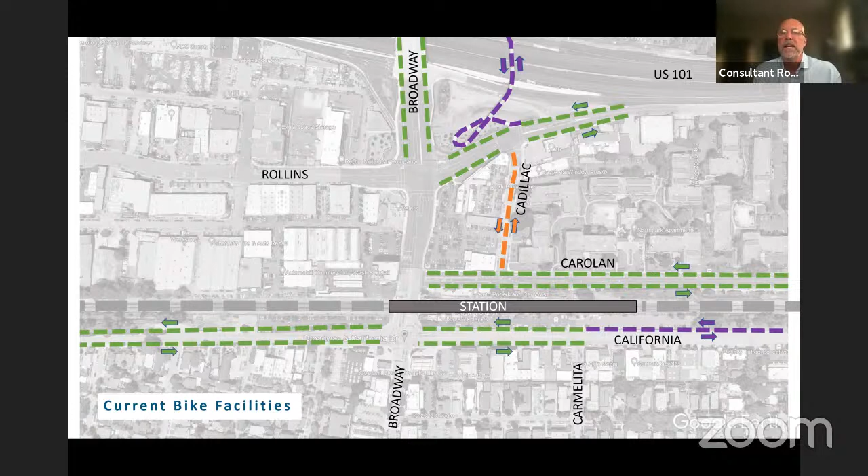And then Cadillac is a bike boulevard, which ultimately ties you to the class 1 structure up and over 101. So that's what we have now.

In the future, there's also two class 2 bike lanes, on Broadway and on Rollins, that'll come in as a future project, not part of this project.

The ultimate goal is to have a 2-way bike path that runs all the way from the Burlingame station to the Millbrae station on the rail side. That's been identified in the bicycle master plan, and that's what's being built essentially for everything south of Broadway to Oak Grove, a 2-way path.

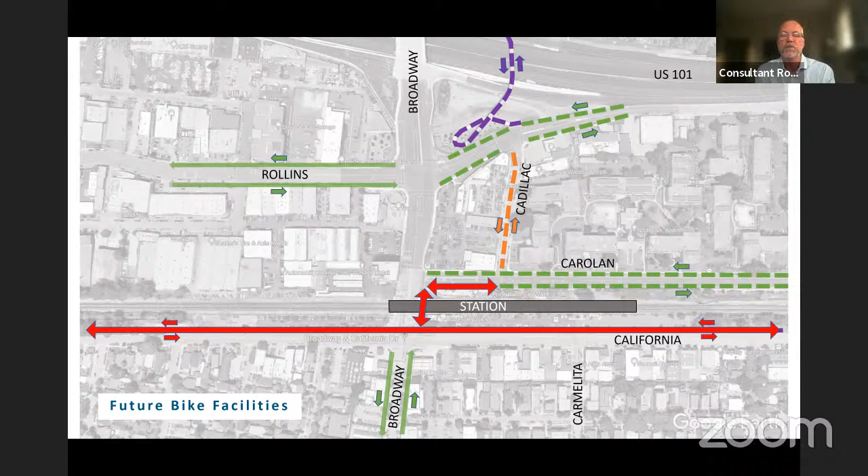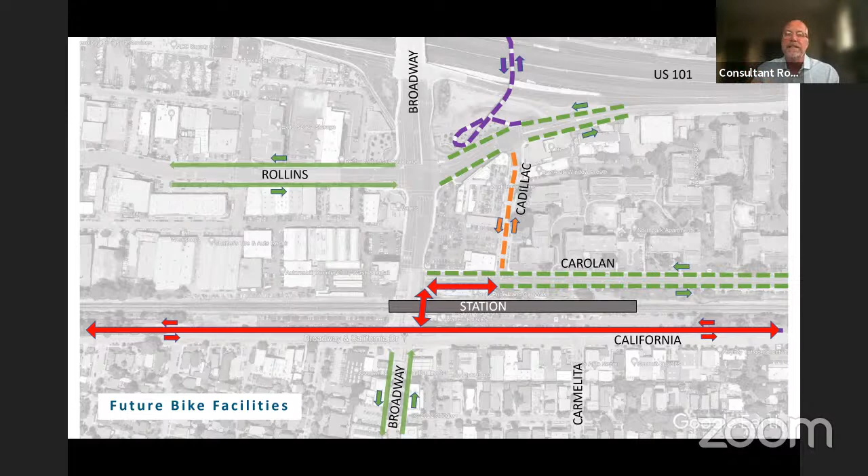Also identified in the bicycle master plan is a new connection, a new class 1 2-way path that connects from California to Carolan and then down Carolan over to Cadillac. You'll see why that's an important connection, especially if you come up over the structure onto Cadillac. Now, how do we get into these nice facilities that we're building?

We also are building a park and ride lot, which goes between the embankment where the tracks are and Carolan Avenue. And they're building an 875-foot long station platform that runs across the top.

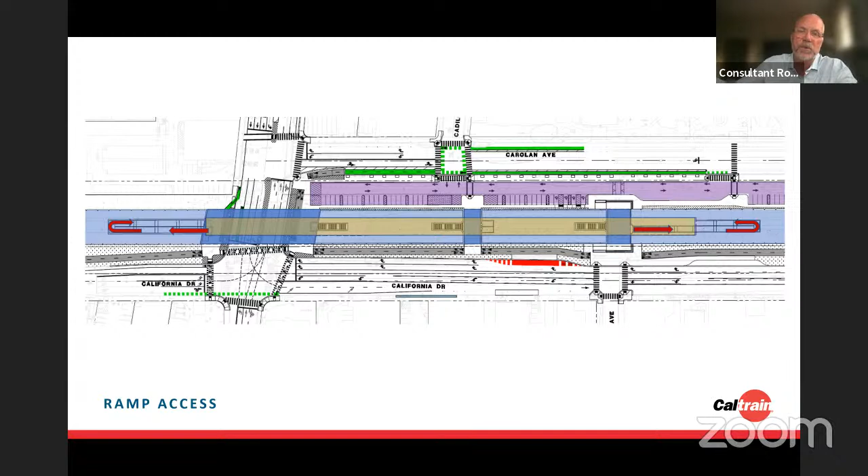That'll be accessed by stairs—3 sets of stairs—that'll take you up from these access points onto the platform. And then on the outsides, at the ends of the platform, there'll be 2 ramps. There will not be escalators, there will not be elevators at this station; they'll be accessed, ADA accessible, via these ramps.

Outside the station, we have several things going on—bus stops. On California, we're relocating some of the bus stops that were closer to Broadway over next to the Carmelita entrance. And then on Carolan, we're putting in a bus stop across the street on the east side of Carolan.

On the west side, within the park and ride lot, we're going to provide space for 2 40-foot buses that can drop off and pick up passengers there, circle around, go up Carolan to Broadway and out. We're also, in the purple on the lower right, putting in a kiss and ride drop off right from California.

That'll accommodate 3 or 4 cars—drop somebody off, or a quick Uber pickup if you're heading that direction, jump in and go.

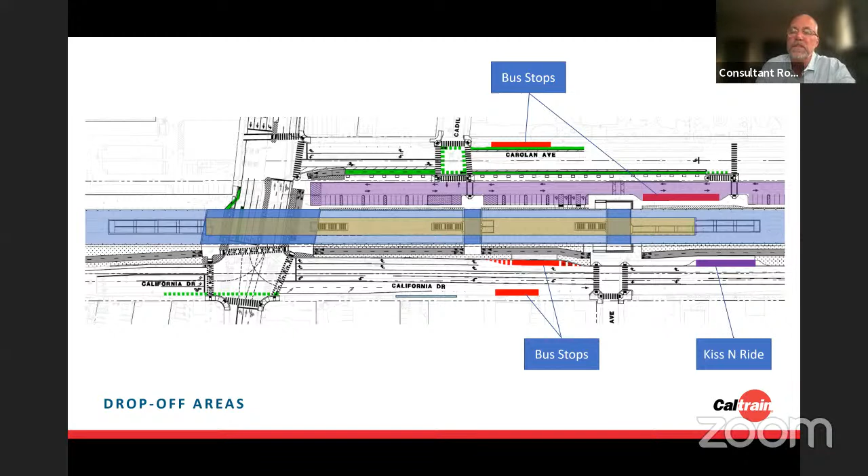We're also putting in bike lockers and racks right there at the Cadillac entrance, which is convenient because that's where you have the path that goes all the way to the class 1. It's a nice central location within the platform to drop your bike off or pick it up and then head out.

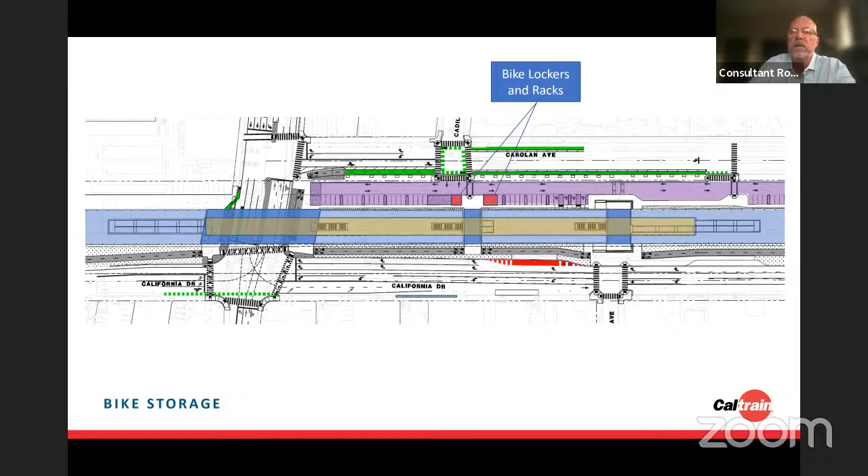And then of course, all the things that we're doing for the bike ped path that we have running through and around the station—the idea is to make it really easy, kind of stress-free, to be able to ride your bike and either go to the station or across the station, continue north or continue south along here.

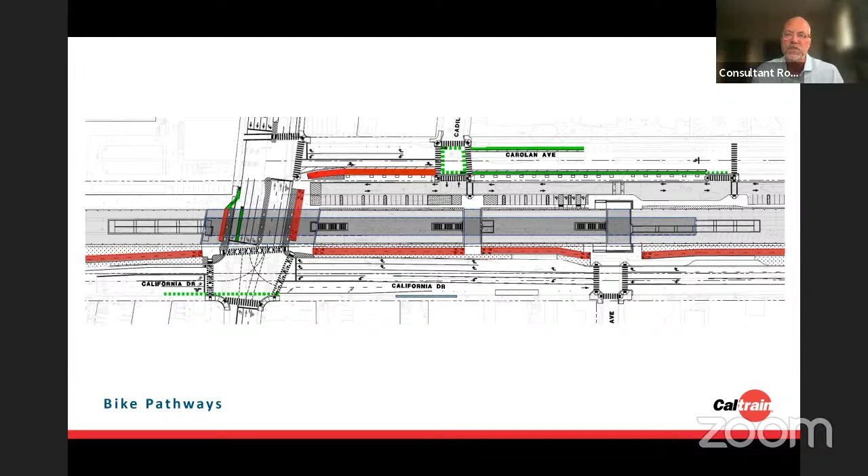So this is the overall improvements. It's zoomed way in—I'm going to zoom in on different areas to explain what's happening.

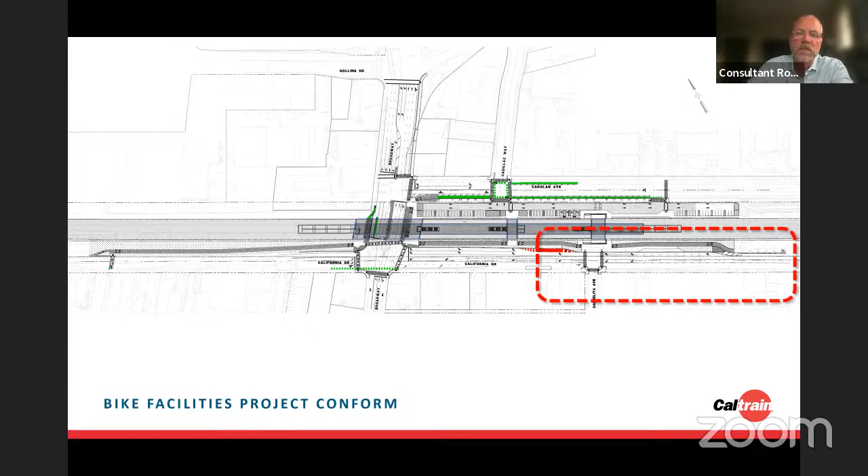On the south end, our conform is to the California Bike Facilities Project, shown here in the upper right in green. That's what's being built soon, that's what's being designed now—it's past the 65% design level. I know it's been in front of this group, this commission, before.

So what we want to do is pick it up from there, right past—it's about at the end of this green arrow. On the backside is Sanchez Creek. There's a box culvert; you can see the creek out there going underneath the railroad tracks.

That's about where the current path that's being built would be terminated. And we're taking and we're building the new red section, which is going to go up onto essentially a sidewalk level, up and through and parallel to the station.

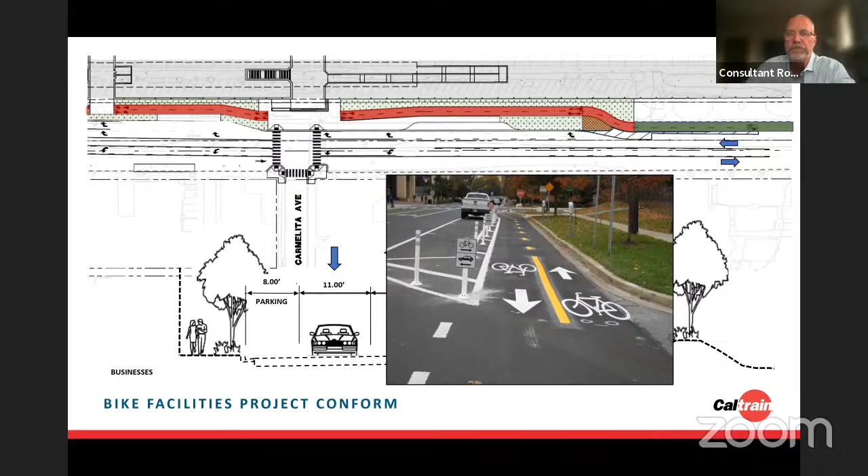So moving down a little further, now we're at the intersection. Again, it's 30,000 cars a day, so it gets a lot of traffic through this intersection - California and Broadway.

So if I'm looking at the red path that's running along the station, what you're going to see in cross section is we tried to maximize the landscaping and reduce the amount of crossing distance. By doing that, we've put in a multi-use path, which is what's designated in the master plan, at least north of Broadway. We've put in landscaping on both sides for the bicycle and pedestrian path, 12 feet wide. And we've reduced the lanes where we can to shorten those paths and shorten the crossing.

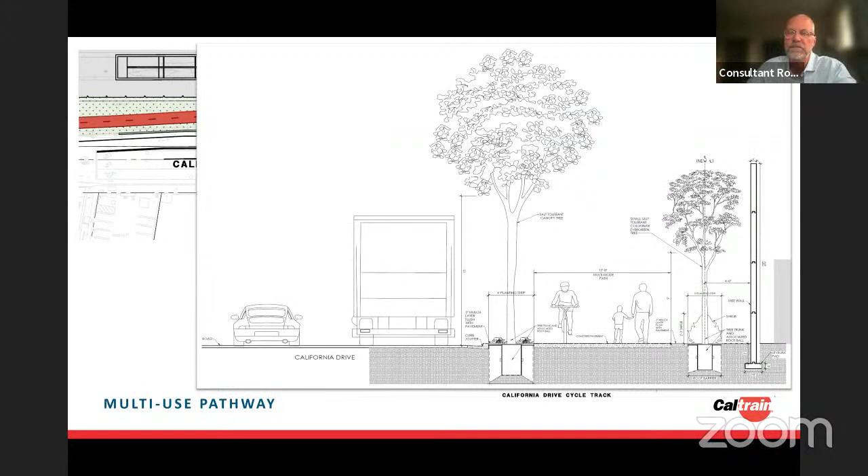So as we move to the intersection itself, I want to point out the double right turns in northbound California - going from your right of screen to your left, 2 right turns that go onto Broadway and head towards the freeway. Originally, in the 35% plans 2 years ago, the plan was to put in a free right and put 2 throughs, which required a pork chop island.

The big reason for this is because we were lowering the roadway 6 feet, and to meet ADA accessibility we were only able to do 1 crossing, which is on the east side, right at the pork chop island. The other crossings really didn't meet ADA at the time. But by going to existing grade, now we have more options.

And the city staff had asked me several times, can we reevaluate this, because free right turns typically don't mix well with bikes and peds, especially given the size we had to come up with for the island.

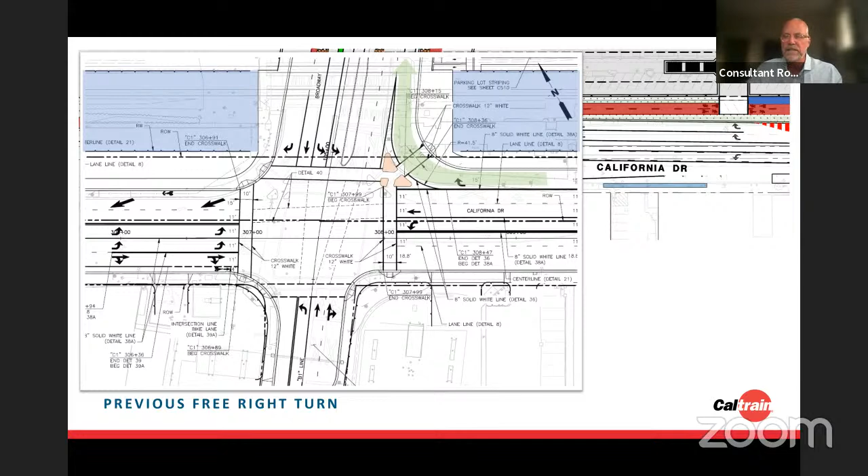So what we did is we had Fehr & Peers, who's on the line, evaluate the traffic again, and they came up with an alternative that actually has 2 protected rights, controlled with a red stop line, which would allow its own dedicated cycle to go through on the bikes and peds continuing north and south. We've done this many times - there's LED boxes you can put in there with no right turns as this signal is going. That's how we're going to get bikes and peds across Broadway, from continuing 1 path on the south to 1 path on the north.

So the old structure was a 2-span structure, and one of the comments we've heard is, is there a way to get a class 1 bike path through here, whether it's a tunnel or whatever? What we found is by not lowering the roadway, we can reduce the structure depth by actually adding 2 more spans, which then doubles as a benefit for providing access for bikes and pedestrians, and more space on the entrance to the station.

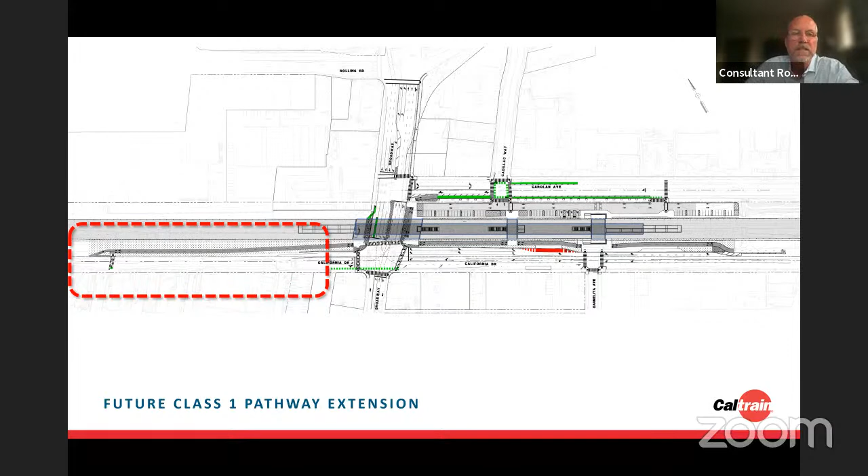And so now the structure has 4 spans instead of the 2 spans over the roadway itself, which makes it a lot more inviting, and it makes this bike path possible, which is again identified in the bike ped master plan. The last thing I wanted to talk about is our project goes all the way over to the far left.

So we want to take this opportunity to realize some more of the future multi-use path that runs along the east side and get it as far as we can. So we've selected Lincoln Avenue, which seemed like a good location to actually make the crossing. If you're heading northbound from right to left on the page, you can continue as a bicyclist onto an on-ramp, essentially, that takes you right into the existing class 2. If you're heading southbound, you can do a 2-step left, go across the crosswalk, enter into the path, and that'll continue you straight to the south towards the station entrances.

And what I like about this is, you have a nice facility out there now, but the bicyclists don't have to mingle with the heavy intersection at Broadway and California.

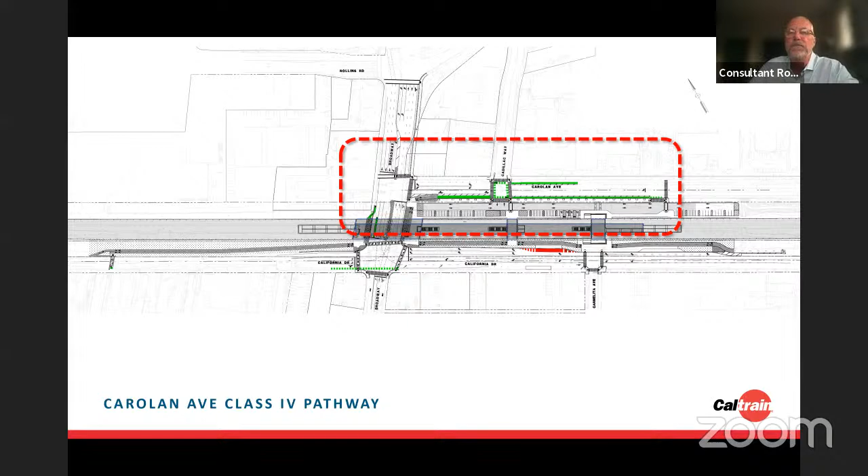And then the last area I want to talk about is on Carolan Avenue and how we handled this. So the bike ped master plan talks about not only doing the class 1 underneath the tracks, but also on to Carolan over to Cadillac. So that was the entire project. We originally looked at something shorter than this and trying to tie it into the Broadway Carolan intersection. But after figuring out how bikes and peds would operate through this coming from the bike boulevard, it made so much sense to put this in.

So in cross section, what you're looking at is we want to use the existing curbs that are out there, and similar to how we have it on California with the class 4, do the same thing - have a class 4 that goes from Cadillac up, you see it kind of in green, and then bring it up to sidewalk level to take it underneath the structure. That's how you would connect to Cadillac Way over to California and up and down California.

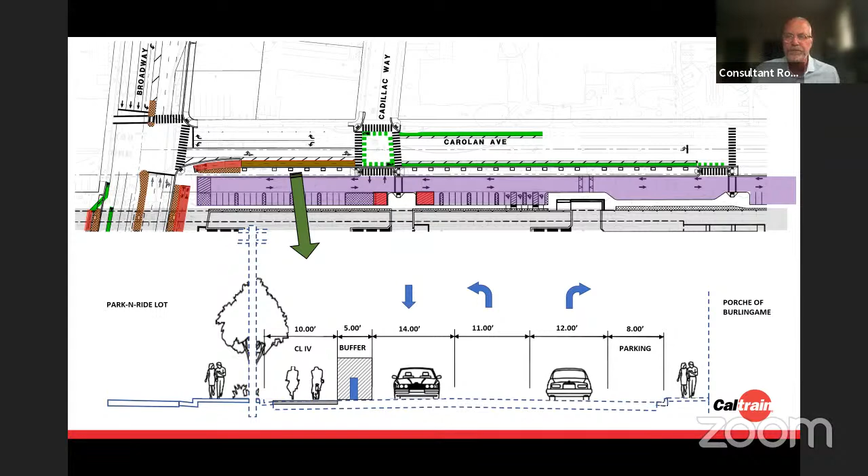Okay, that's the end of my presentation. What I did is I have open discussion here, and then I put the agenda and everything I started off with on the right-hand side to help you trigger some comments if you have some. That's it for me. Well, thank you very much.

That was concise and clear, and it was really, I loved having the aerial view as well as the street level view. So thank you very much.

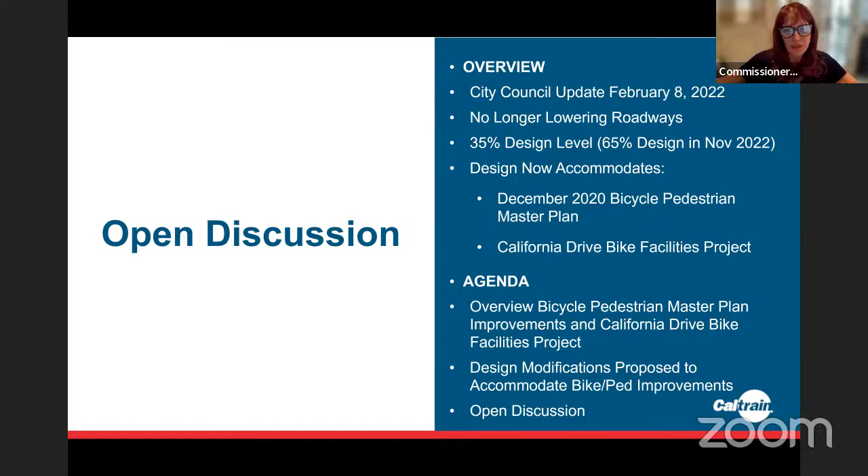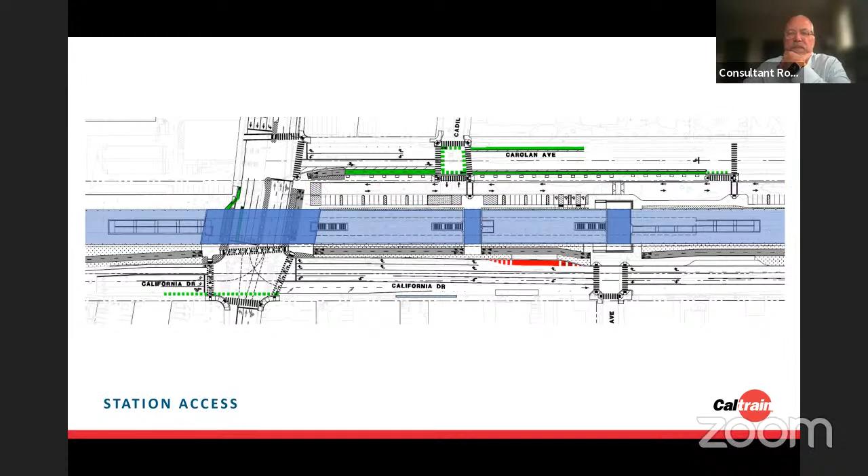Sure, I'm gonna have to back through some of this. I think it was right before I got into all this. So there's this that shows the air photo, and then I have another one that shows the improvements and those total limits - whatever one you want. Let's leave this one for now. So we're within the black dotted lines.

Yes, that's correct. So the black dotted lines - we're not showing a bike lane on Broadway Avenue connecting with the Broadway overpass over 101. Is that correct? You're not putting them there? So this is what we do - we have a shoulder that could easily be designated for a bike lane. It has the same width and everything. But in the bike ped master plan, it doesn't identify it as any class. I think the idea was to take it up Cadillac and over and get traffic off of Broadway, I believe.

Okay. It'd be nice to incorporate. I see bicyclists there going over to the bike-ped overpass over 101.

If you look at the purple snake there, it's really long, it pretty much doubles your trip. So I do see bicyclists going straight ahead across Broadway. Be nice to incorporate a bike lane there, even though we have the other thing, bikers still use that.

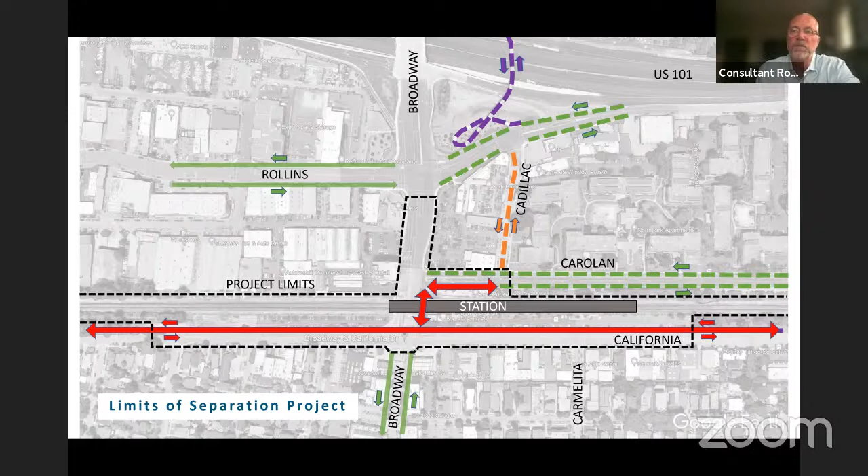So the south is already built, the dash lines are already built, so there is a class 2 bike lane there. It's the solid one to the north of Broadway on Rollins - it does not exist now, but it's included in the bike-ped master plan. Okay, all right, thank you.

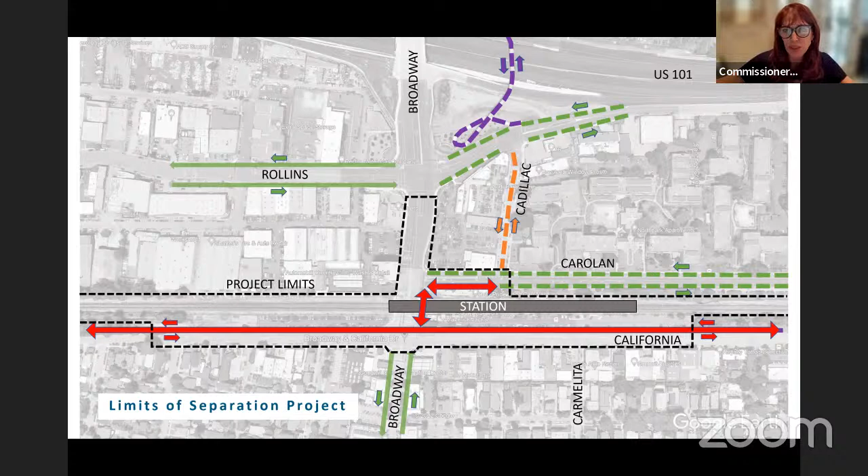Then along the parkways, we have numerous places where we're improving the side of the road. Are we going to have trees along the curbs everywhere, like a 4-foot strip - where won't we and where will we have trees? We need the trees separating the roadway from the humans.

Let me see if I can get to another graphic really quick. Okay, here we go. I hope you can see this - there's a parkway all the way through here. So everything on California to the east and south of Broadway is all separated with a new parkway strip and landscaping. Everything north of Broadway, same thing.

This one, I think we're proposing about a 7-foot parkway strip through here because we have a little more availability. And then here along, well it's not there now, but the park and ride lot - we plan on putting, these are all tree wells through here, all the little tiny dots.

There was nothing in the previous plan, and there's nothing currently planned for Broadway from Carolan to Rollins. Are we able to put some trees in to separate the sidewalk area from the roadway? I have to talk to Andy because there are some utilities, also there's a Porsche and Audi dealership. If we have direction, I could certainly look into it, obviously it may take a little more right of way, but that's something, if there's money within the budget.

Okay, and then I just have a list of like 8 things, so sorry about that. At the southeast corner of the train station where Carolan and Broadway meet - to your left, stop down a little, there. Can we get some trees there for the pedestrians instead of all concrete? Get some trees in there, plants, bushes.

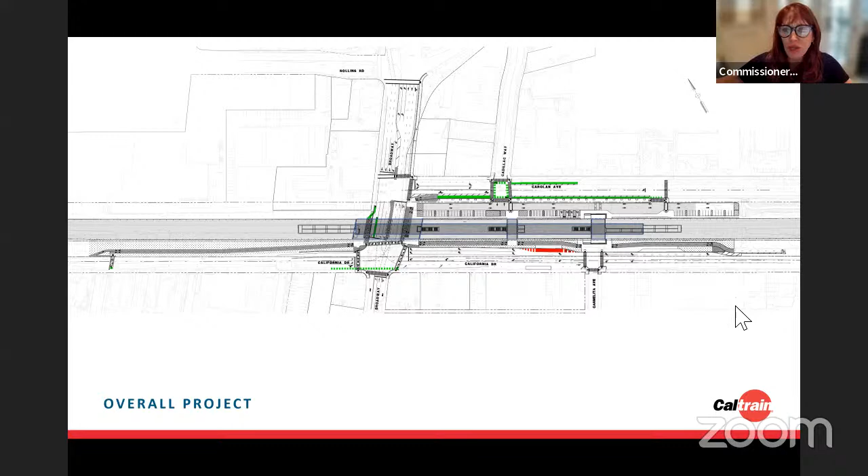And then what I see on all of these crossings, particularly that double right turn, which is not my favorite - all of these, can we stagger the first lane further back, so the stop lines are staggered, so pedestrians can see the vehicles and the vehicles can see the pedestrians? The first one goes back so that at the second one, everyone can see everyone stopped.

And it makes pedestrians much more visible? Yeah. Stagger all of them, every single one, all the way, the whole area - that's my suggestion.

Want to make sure I understand which way you're staggering - towards the crosswalk or back away? Back away, okay. So the first one, lane number 3, that one should be further back so the pedestrian crossing can see this truck or car, where the second right turn arrow is.

You want to be able to see. And again, this crosswalk, why do we have a diagonal? Can't we go perpendicular to the curb? Let's make it perpendicular. The problem is when cars make a right and a pedestrian is far from the end return, it's not the best situation. We want to bring pedestrians closer to the line of sight, so that's why we skew them - if I went straight, the curb ramp would be over here and somebody would come around and then see the pedestrian. We've come up on this many times before. It's just better to put the ADA curb ramps at the end return where you could be seen.

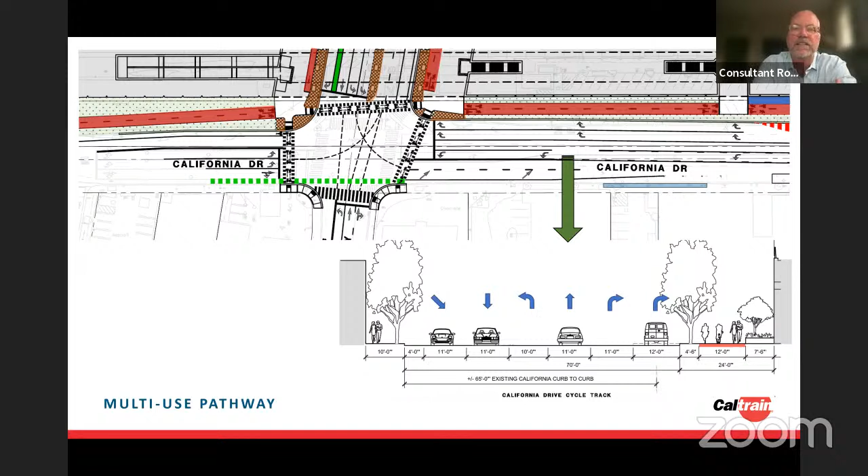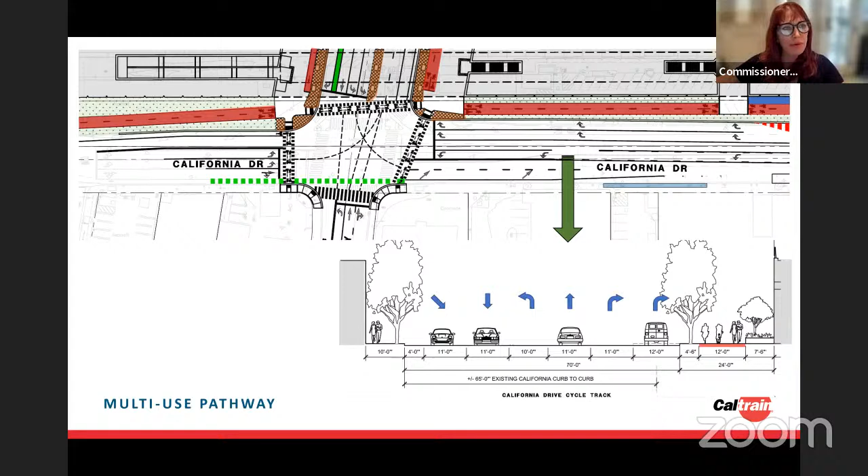Okay, so my last question was, how do you cross Lincoln with the bike? I think that's to our north. How do we cross Lincoln Street, how do the bikers and people who want to cross it? Is that a controlled intersection now? We're going to evaluate, I don't know at this point, but we're going to evaluate what control would be necessary through here. Because we're trying to hopefully get that roadway down to 30 miles an hour, which means people probably go about 38, which then they don't stop for you. So we need a control crossing there.

And that's all I had right now. Thank you. Sorry for dominating, I had all these notes. No, good comments. Thank you.

Through the vice chair, yes. Just wanted to throw a quick comment. We're talking about the pedestrian refuge.

As Mr. Himes pointed out, the design vehicle we're using is one of our fire engines, and in my experience, having a small island, you need to have the island of significant size. It needs to be a certain width, otherwise vehicles won't see it and they'll hit it. I've had that experience, so that's something to keep in mind - if you make it small, people aren't going to see it, especially at night.

We call it target value - it'll get hit. You've seen some of these curbs when you go around, you'll see the tire marks rubbed up against it. That happens a lot, even in San Francisco, where they've got a lot of these refuge islands. Not saying you don't have them, but obviously the wider you have them, the larger, the better. But in this case, because of our design vehicle, which is an emergency vehicle, it's a trade-off. Just wanted to add that.

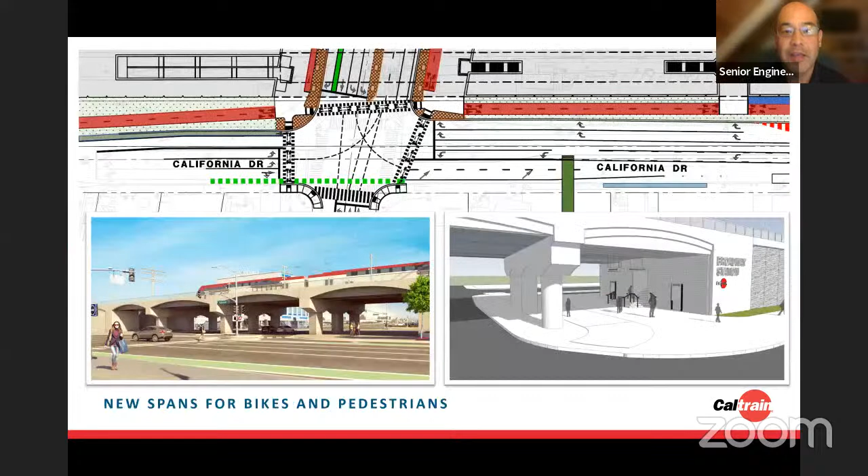Agreed. If you can achieve it, I think we can go down to 4 feet, but what we have there, if you're talking about a tip, it's going to be much smaller than that. I think that's where Mr. Himes is going. We've got the end towards - you can go back to that slide. If you go right there to the east of the crosswalk, you've got a wider one, but you're talking about putting one on the other side of the crosswalk, which makes it a little more difficult.

Yeah, and again, that's where you can't put anything large enough, otherwise an emergency vehicle, a fire engine, will not be able to negotiate that, and it's a trade-off. That's all I'm putting out there, just for everyone's consideration or education on that, and how we get to certain things.

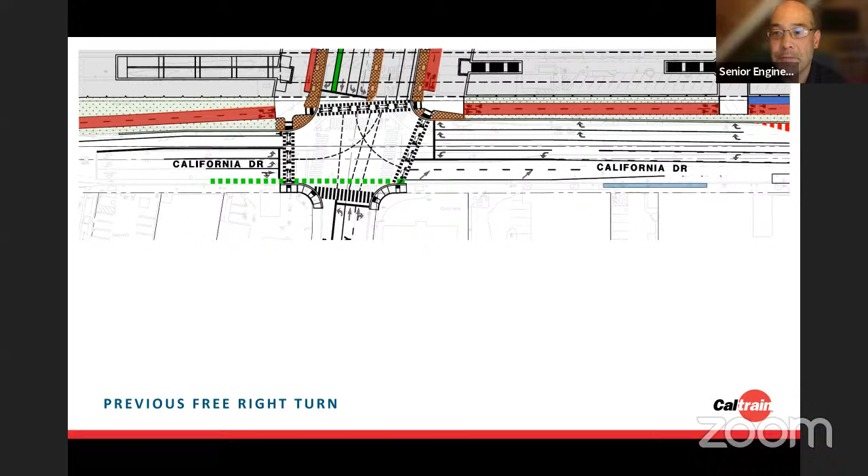Okay, thank you for explaining that, Mr. Wong. Yeah, I do know what you mean. I have seen those smaller islands, I've almost hit some of them, and my concern would be a car that hits that, then gets careened off into a pedestrian that might be in the crosswalk.

But okay, I have a couple of questions, not very many. I wasn't aware of the change that Broadway wouldn't be going below grade and coming up - I wasn't aware. I don't know if other subcommittee members were aware that it had been decided to stay at grade, so I just have some questions regarding that.

Does that mean that the elevated portion of the trains will be higher? How does that affect the whole thing? Is everything just shifting up?

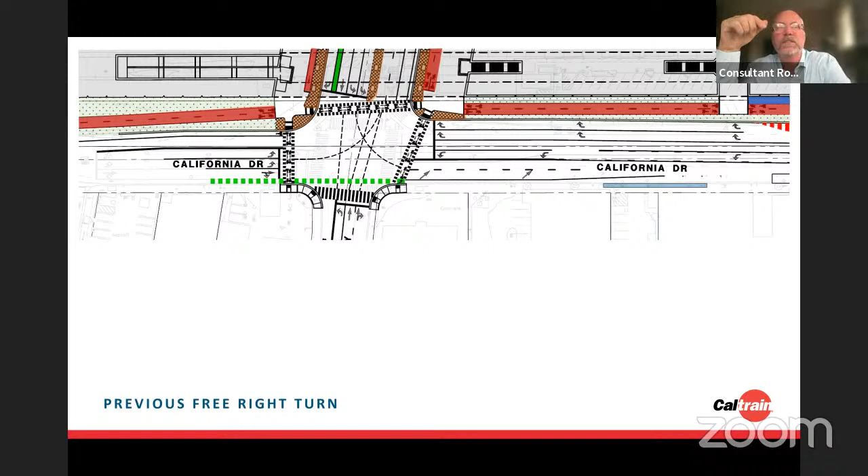No, we're actually using a different type of structure approved by Caltrain - a thinner structure called through girder. So the trains are actually sitting between the girders instead of on top of the girder. There is a 2-foot increase in rail, but only at the station platform, and then it actually goes down a little bit lower on some of the conforms. That's how we made it work.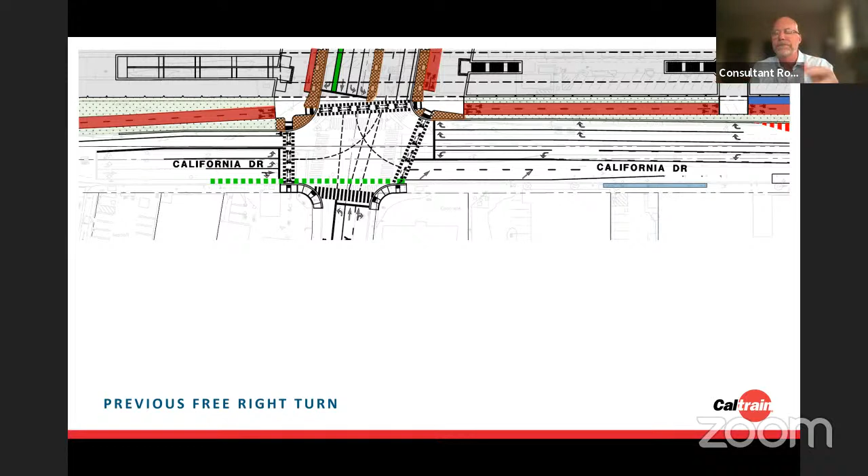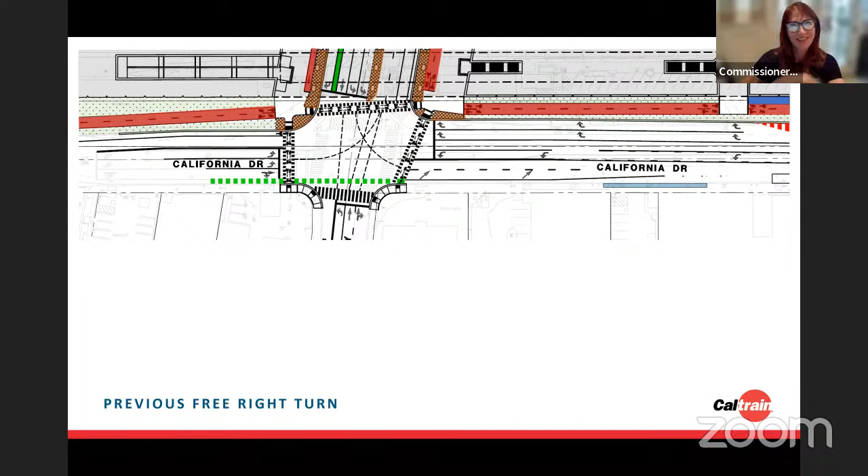But the problem, as I explained, is with the lowering of Broadway, even a slight lowering, there's a significant roadway closure. So we looked at modeling - Fehr and Peers actually did the model of what would you do with the 30,000 cars that would normally cross here, or some fraction of that, and how do you get them back around. We found there was pretty significant delays getting to and from the west side of California to the freeway and vice versa. To give you an idea, the original plan was probably a 12-month, like a 1-year closure of Broadway, and that's why we took this as an important piece to try to mitigate.

To keep Burlingame sane - well, it's funny, it's 1 year just for the track work and the structure and the lowering, but then there's another year in front of that where you're relocating all the utilities and lowering all the utilities throughout these streets, which is not easy either. You're closing lanes, you're doing things at night. So all that pretty much went away.

That's amazing, relative. Okay, thanks for explaining that. I just wasn't aware that change had been a possibility.

This is kind of a small question, but what's going to happen with the old train station that's currently there? I believe it houses Maverick Jacks now. Is that of historic value, and what's going to happen with that?

Yeah, they will have to be removed, the Chevron gas station, and they're aware of it. They've been talking to Caltrain right of way folks, but that would have to be removed. And then the gas station, the Chevron gas station and car wash would be removed for the park and ride lot. But again, going from a lowering, we had something like 20 plus parcels with acquisitions of gas stations, and now we went to I think 7 sliver widenings for temporary construction. We've really reduced it.

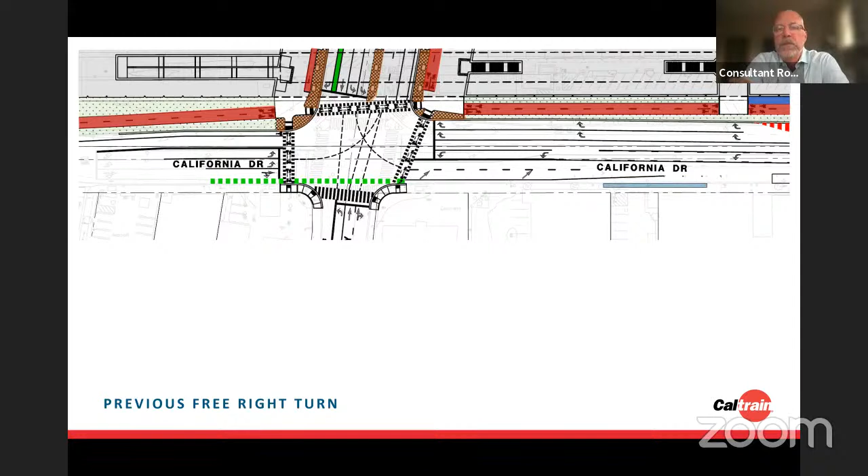Okay, thanks. I was just curious if that was going to be removed. And then lastly, I like the kiss and ride little pullout. That was one of the things I think we worked on as a Broadway subcommittee.

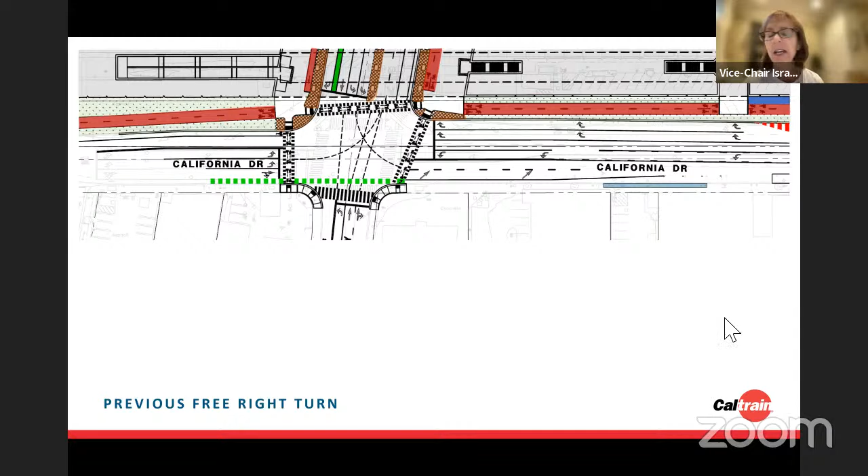But my only question is, I am a little bit concerned, even though I'm not 100% sure, but it seems like three or four cars. How do you keep cars from just parking there and waiting for extensive periods of time? Because I know at BART and Millbrae, there's really maybe 10 cars at any given time that are waiting to pick up and drop off. I'm just a little concerned that it might not end up being very functional if people just kind of hang out there and aren't moving along. Could you just comment on how those spaces are used and what problems we might have with that?

Yeah, ideally, everybody would swing around to the park and ride lot where there's plenty of spaces to wait for somebody to come off the train. I'd hope, and I hate using hope in engineering situations, but if you're the fourth car in line and these cars aren't moving, you'd go, okay, I'm going to go up to the light, make a right, and go into the parking lot and wait, and not just hang out there.

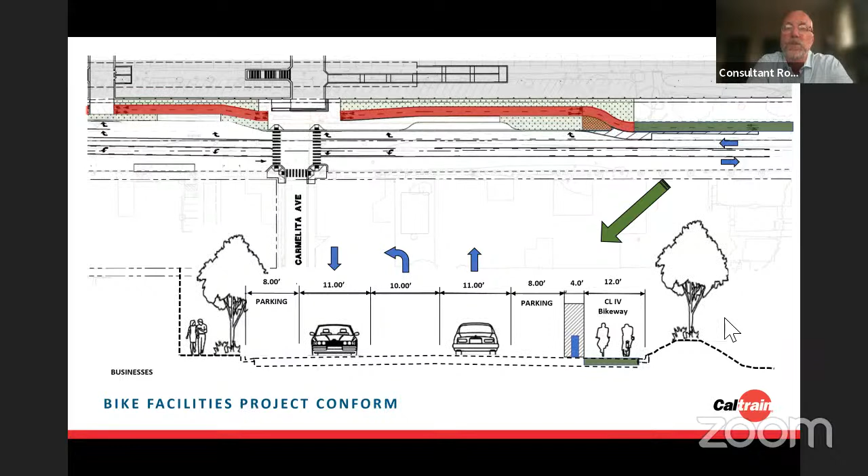And they are shielded, it's hard to explain, but right where the two blue arrows are on the right, just between the green and that blue arrow is parking, buffering the bike lane. So you could imagine the right turn pocket coming out. They are shielded behind that parking and could extend, and people could still make their right and still go to Broadway. So it wouldn't be a terrible situation. It's just hopefully people would understand to move around, go one block down and around, and go into the park and ride lot.

Okay, just curious, do they ever make it a drop-off only lot as opposed to pickup as well? Because drop-off obviously would be quicker. Is that ever done? Yeah, we could do that. That could be a consideration. Okay, just because of the tight nature of where it's located and all the timing.

Okay, those were my only questions. Let's move to any public comments.

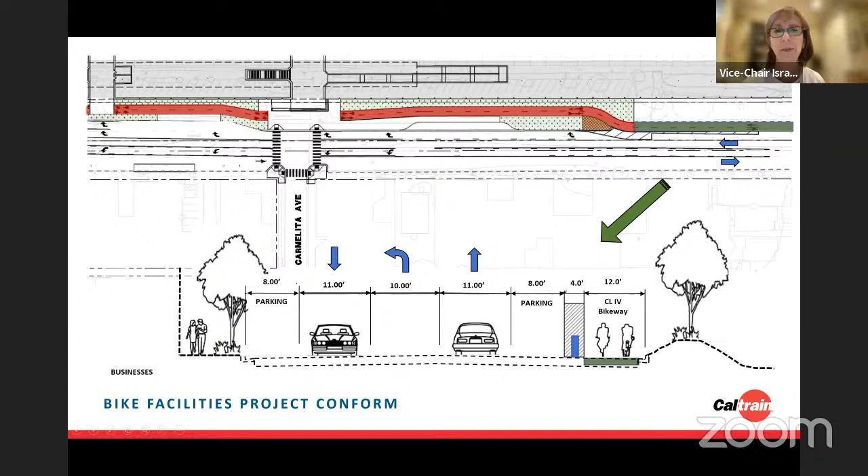Okay, hi, I'm Drew. I've been following this project for many years. I'm a Mid-Peninsula resident. I think it's been vastly improved just in the last year or two with some of these additions. It's just impressive, it's been nice to see. So congrats on that. I'll try to blast through since I only have probably 2 minutes left now.

So any kind of 90-degree angle, trying to add 45s or doing something, so you don't walk out and instantly hit a bike, or instantly hit a cross pedestrian and stuff.

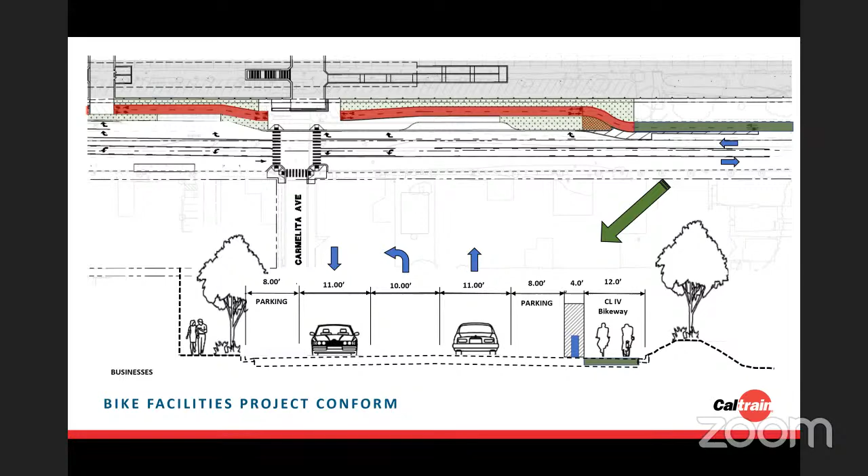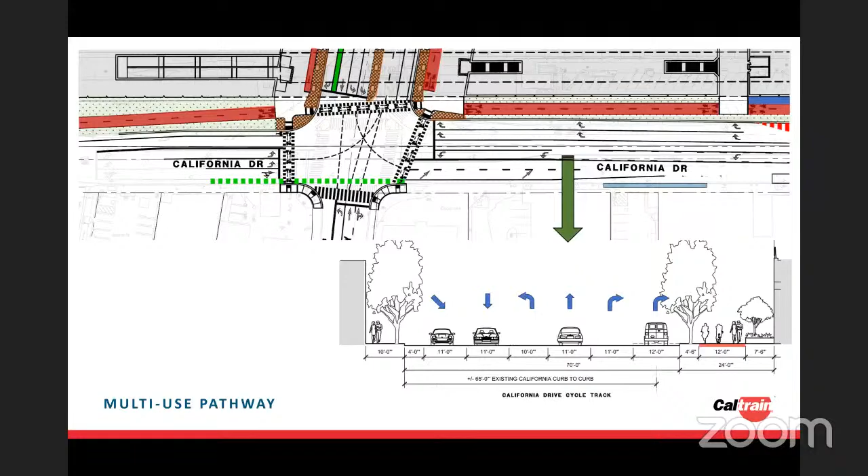And the kiss and ride — I think there should be something on southbound California Drive, because people coming down will just want to drop off passengers. If you don't provide it, Uber drivers will just stop. I've been stopped by so many Uber and Lyft people randomly saying they're picking someone up in the southbound direction. I have no idea if there's any right of way available in this zone, but that's the flip side — they'll just do it anyway, it doesn't matter.

I know there's a lot of other little things, but the other last big thing you didn't talk about is the undercrossing farther down south. You may not have any slides about that, but there are so many positives compared to like 30% a year and a half ago. So, perfect, yeah.

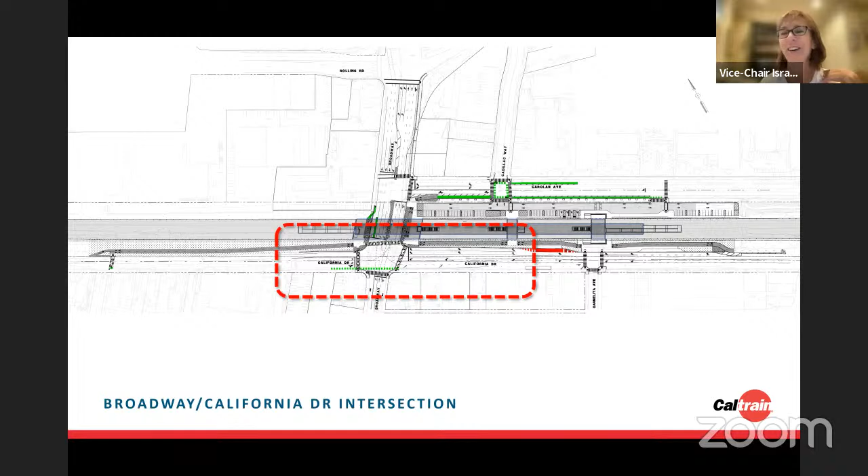Commissioner Revelos, you have your hand up and I was going to call on you anyway. Go ahead. Thanks, I was just trying to make sure I was following protocol. Anyway, so yes, I do.

I really like the plan overall. I'm really happy that it's going to be the grade on Broadway - it's going to stay level. I'm impressed by the overpass design. I love the tunnels.

I love the openness to suggestions. My comment is really just there's been so many good comments already, so I'm just going to focus on Lincoln and California.

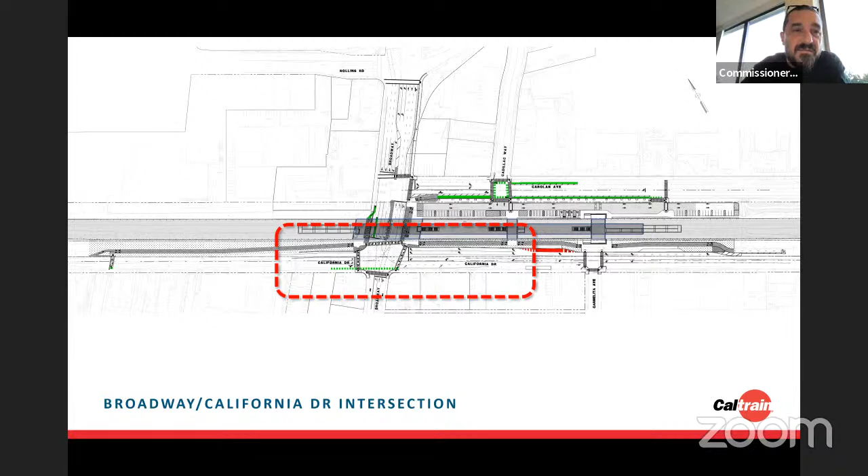I travel through that intersection a lot, and I think it's going to require a unique discussion. It should be an item of its own - it should have its own life, so to speak. So I just want to say that I don't want to comment on what I think should be there, but...

I would like to just say that I hope it comes back to committee for some advisory or council, commission. At which meeting am I at? I do a lot of meetings. You could just say us. Back to us. So that it comes back to the commission for some advisory.

But I'm looking forward to talking about that. But I love this - the what are you calling it, a parkway? I love that. I'm actually really excited about it, I think it's really great.

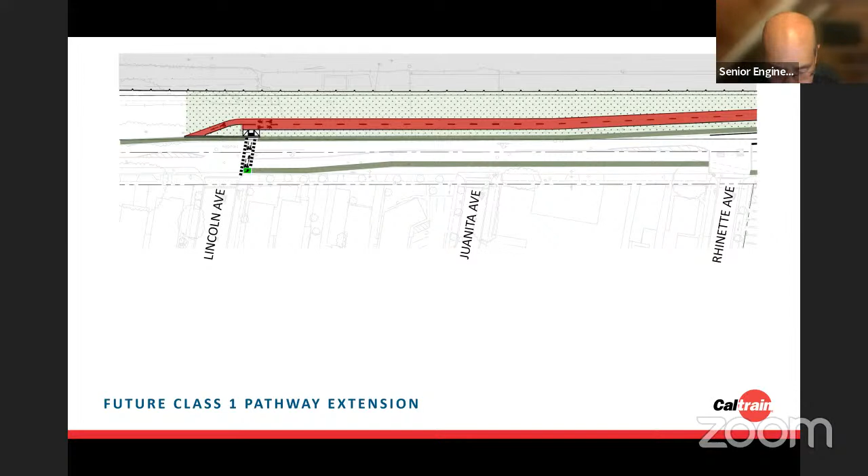Thank you so much. I guess I don't really have a whole lot to add, honestly. I feel like you have done a great job with making this not like an imposing structure like we initially were afraid of with an elevated train station. I feel like you're paying a lot of attention to the greenery and shrubs, and there's a lot of park space. I think you've done a superb job - I don't have anything that I could add or would like to see changed.

Thanks, and it's rare that a new project or presentation gets such acceptance from both members of the public and commissioners. So well done.

So, all right. Through the vice chair? Yes, go for it. Before you move on - oh, you're muted. Sorry, I did the wrong thing, sorry. No problem, I was trying to put down my hand.

Just want to let folks know that thank you again, Mr. Himes, great presentation, and you can get more of it not for this commission, but for the public community at large. We will be going through a presentation of the aesthetics at some point coming up. I'll make you aware of that when we actually set the date - we haven't set one yet, but please look for it. It's still going to be a Zoom type format, and you'll get to see the different aesthetic options that we've gotten a little look at, but you guys will have some in more detail and be able to weigh in on that, because that's the next stage. But first, that's going to go to the council subcommittee, and then it'll go out to the general public. So please look forward to that, and I imagine Mr. Himes will be leading that one too. So thanks again.

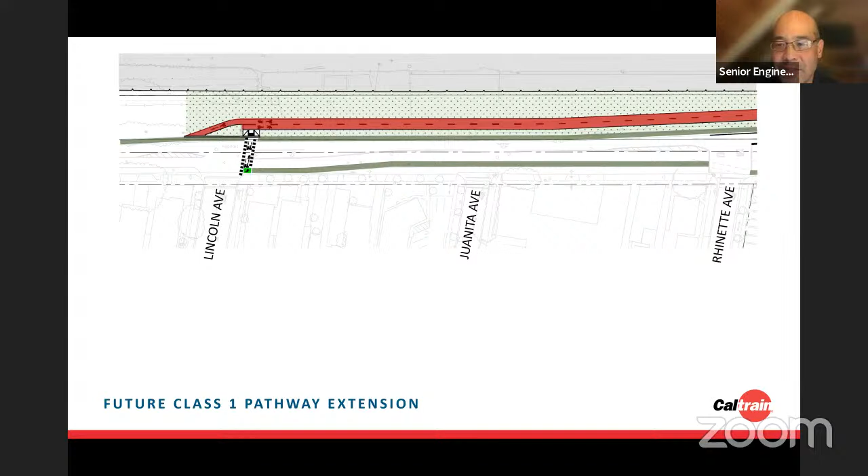Yeah, thank you so much, really appreciate it. Great, that was painless.

Okay, let's move on to item number 7, information items, and we'll start with the engineering division reports with Mr. Wong.

I'm sorry, just get it in place. All right, thank you, Vice Chair.

Just a couple updates: the El Camino Real water line main improvements. All the heavy work along El Camino is done. Now they're just tying in the services, and we look for that project to be done sometime next month. So for all the traffic, thank you for your patience, but that's hopefully coming to an end.

Our current street resurfacing project, we've already had a kickoff with the contractor, so that will be going out. They're starting, obviously, once school lets out. I believe those are the first locations they're going to try to attempt to take care of.

And we've gotten some of the preliminary stuff for the bike boulevards. We'll incorporate that into it because there are a couple bike boulevards on that. So once we see some of those, and the last one is the bike boulevards, we will bring this back to you next month.

I think we've gotten a lot of feedback from the last meeting, and last month I was able to ride with Ms. Beatty and Mr. Valesco on Bike to Work Day, and they pointed out a couple of things riding down Capuchino and Paloma that we'll try to incorporate into the current plan and maybe even phase into the future.

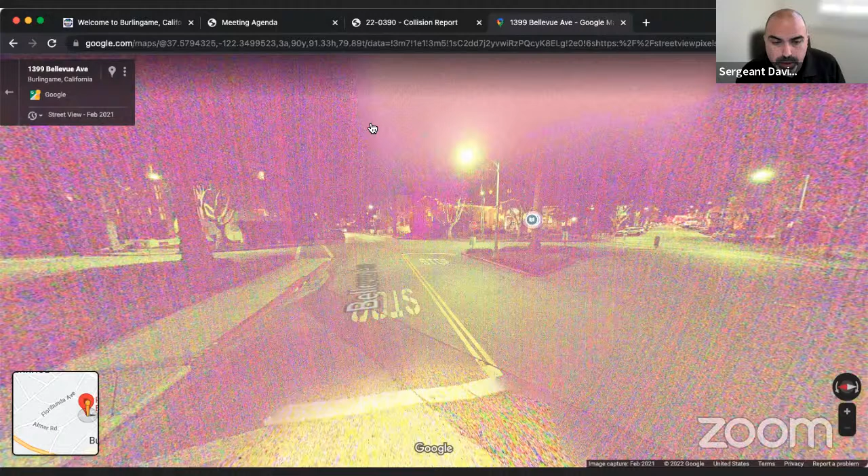So the person on the skateboard was not a juvenile, sorry, it was an adult on a skateboard riding south on Primrose. So they're on the side of the street closest to the stop sign? No, it would be the right side of the street going this way, this is southbound, right? So the driver was at their stop sign, the rider did not have a stop sign. The driver was going east, so it was coming this way. So maybe they just didn't look to their left and see the skateboarder in the road? Possible, I don't know exactly what was going on in the car, but yeah, that's what we believe happened. Was there an injury? Oh yes, it was a minor injury.

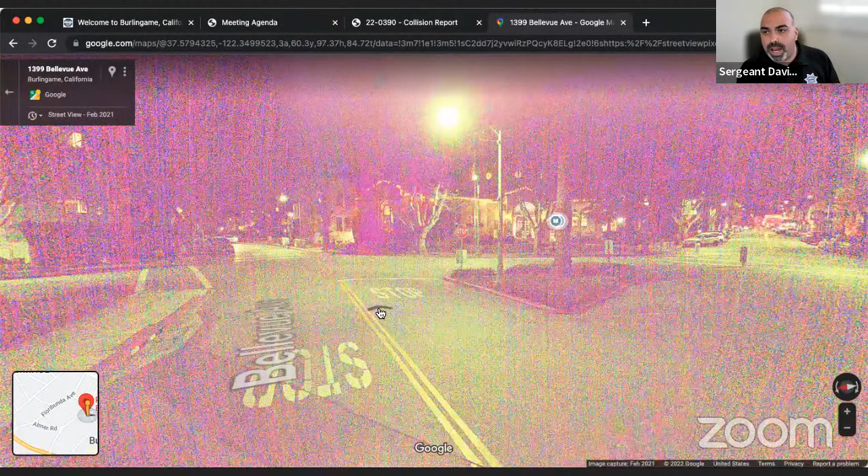So it's scary. Yeah, this is an intersection that I think you guys had discussed before, I can't remember, it might have been some time ago. Because it's almost a roundabout because of this thing here, they could almost make it a roundabout. I don't know if that's ever been discussed or if that's a good idea, but the configuration is a little confusing - this is not a factor in the accident, but I think a lot of people assume that because there's a crosswalk here, it automatically means there's a stop sign. The person didn't say this, but this is just an assumption I'm making.

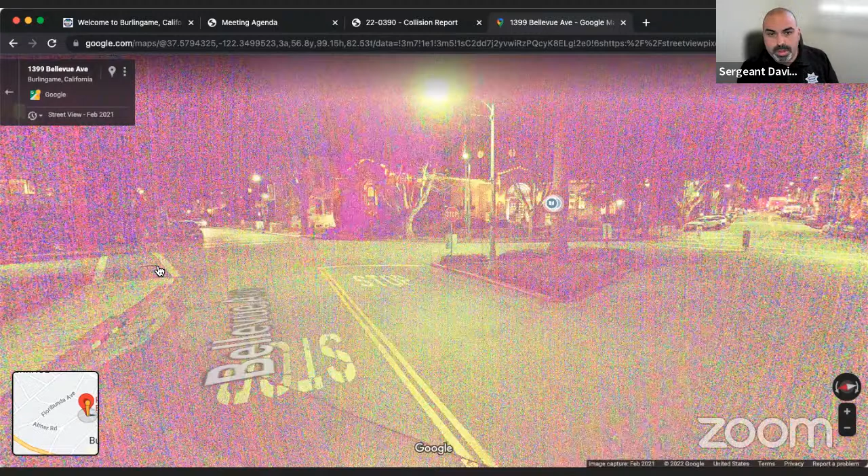So when they see someone approaching this direction, even though the skateboard was actually going the other direction, I think people kind of assume that the car, vehicle, or bicycle is going to stop when they don't. And I think the sign here doesn't have any indication—it's just a stop sign, doesn't say two-way or cross traffic does not stop or anything like that.

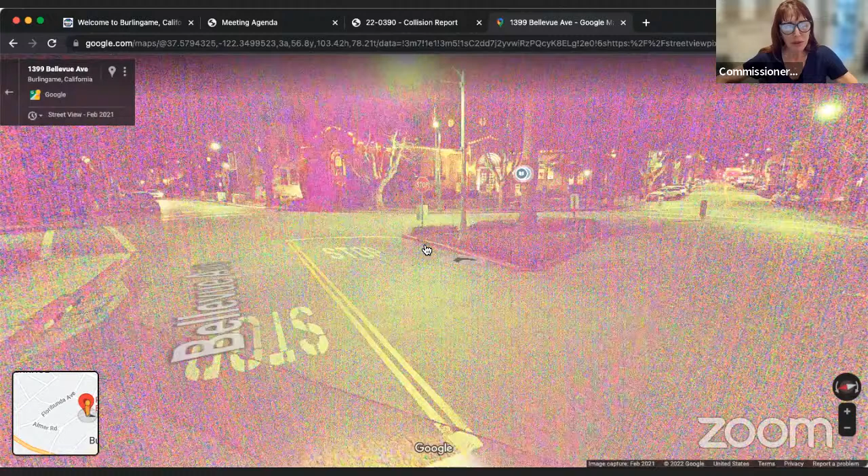Yeah, Sergeant Perna, I kind of agree with you. I'm almost guessing if we looked at historical photos or drawings of Burlingame, this actually should be a giant roundabout in the center, getting rid of this difficult cut-through. Yeah, giant would be great.

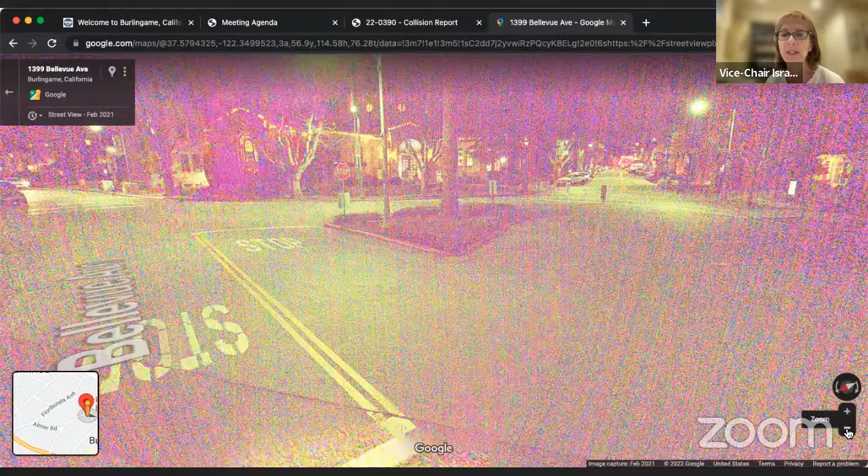Well, it's funny because that had been discussed in the past, and we instituted stop signs at all the feeders, and we realized that in effect we had created a roundabout, and it was much safer. But Mr. Wong—I had just spoken to Mr. Wong last month—we need to improve the signage and the line painting to make it clear which way is one-way. It is in fact a roundabout, but we might need to improve the signage, and that would help with safety here.

Yeah, it gets confusing with all the signs, but it'd be nice to look at some old photos and see if this actually was historically an actual roundabout, so that the center area where all these stop signs are would become vegetation and a circle or large triangle circle. Because it gets very confusing since it doesn't follow a normal pattern.

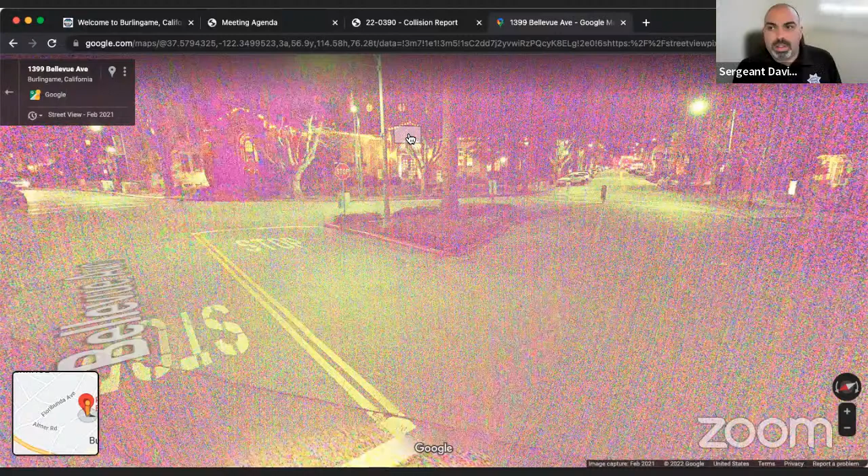So there are very few collisions here, but it's sad to hear that a motor vehicle is hitting a human like that. So we should work on it. Yes, okay, so getting back to this—

I just noticed these weren't sorted by location, they were sorted by date, so I apologize for that. There was one on El Camino and Grove, minor injury, that was a vehicle. I don't think there was anything terribly exciting as far as other ones.

No hit and runs, one DUI collision at Airport and Lang. Did you guys want to discuss any of the other ones? There's Truesdale and Quesada, and there's El Camino and Grove. El Camino and Grove was a minor injury accident.

The Truesdale and Quesada one, I'm curious about. I actually drove through there during the aftermath—they had a car up on the flatbed. Okay, yeah, I'm pulling that up now, give me just a second.

So this one—Truesdale and Quesada at 3:23 p.m. on a Thursday. That's right, when school gets out. Yeah, yep.

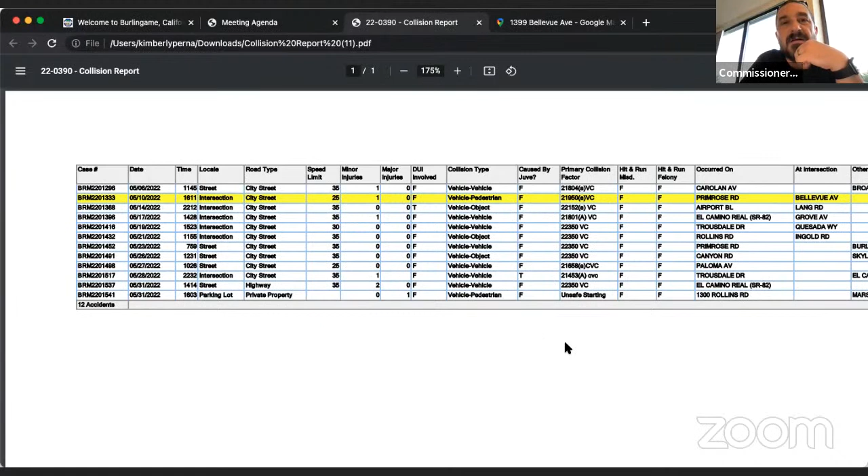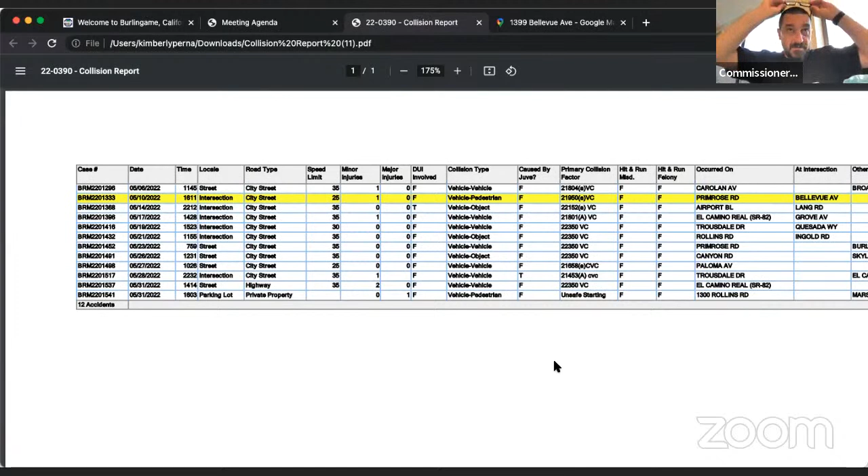That's a busy intersection at that time of day. There's a lot going on, not just the school, basically from 2 o'clock on. There's multiple stop signs as well. They were going eastbound, and there's the one at Quesada, then two other stop signs right in a row after that.

I'm taking that a step further, since that was 3:23 on a Thursday. Clearly it's a school day when children are present, so the speed limit should have been 20 miles an hour.

But what I'm saying is that even if you're going 10 miles an hour and you rear-end someone, that's too fast. If your behavior caused the collision, it doesn't matter if they were going 5 miles an hour and rear-ended this person—it's still unsafe. The factor would still be the same: unsafe speed.

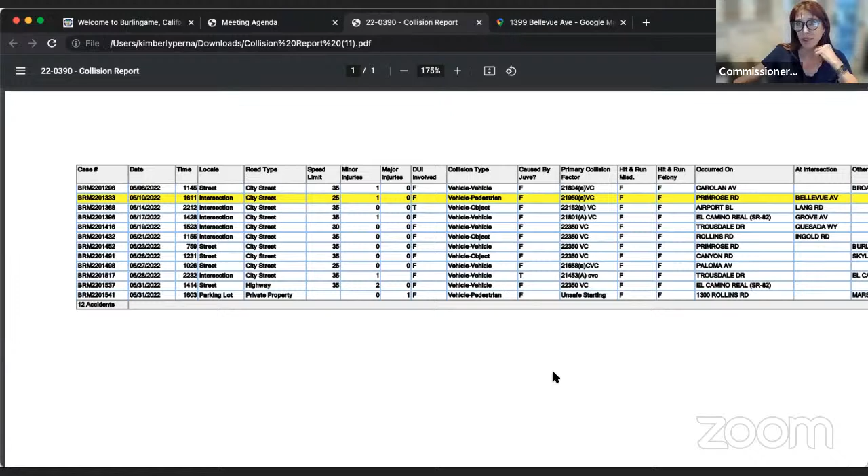Yes, I understand that. I'm just thinking, and I don't know how the other commissioners feel, but it reinforces the fact that I think the 20-mile-per-hour zone should be expanded beyond the one block the school is on. It should apply as people approach the school from all directions, not just the block of the school. My guess is this person wasn't going 20, even though I understand the rationale and agree with you. But I think we should consider expanding it to 2/10 of a mile beyond the school so people start to get the hint that they should be going 20 around the school on school days when children are present. I don't think that one sign saying 20 miles an hour is enough—it should be posted as you approach a school also.

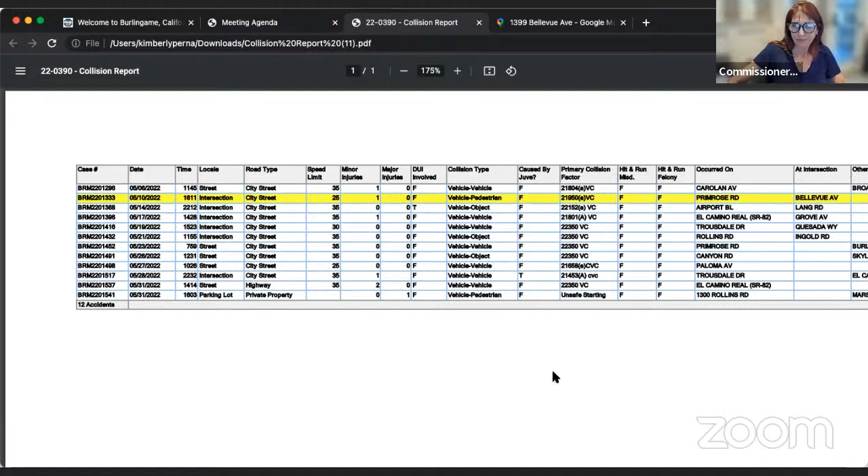Sergeant Perna, can I ask about the accident at El Camino and Grove, now that we're talking about schools? Was that during school hours? This one was at 2:28 on the 17th. Let me open that up here on my computer.

So this collision was on a Tuesday at 2:28 p.m. This driver was... it looks like the driver found at fault turned left in front of the other driver from the number 1 lane. They were going southbound on El Camino and turned eastbound onto Grove in front of the other driver. That's a very typical accident along El Camino, someone turning in front of someone who has the right of way.

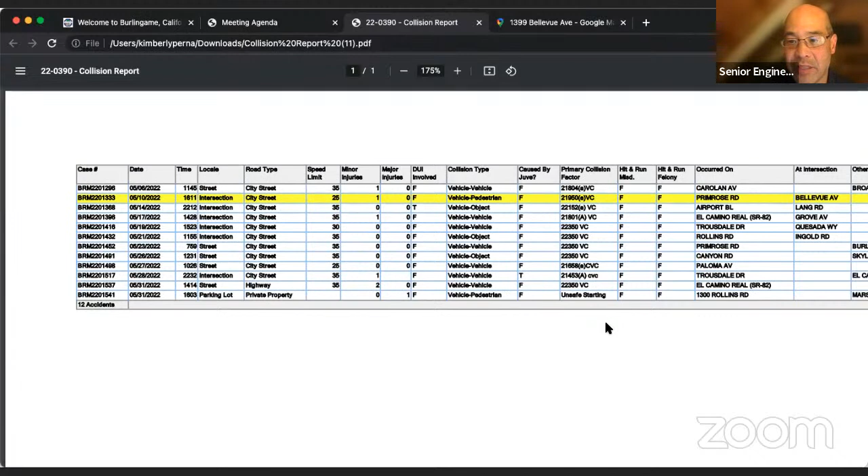So there is some backup in there, but again, it's case by case depending on how bad the event is. Intersections that are flooding probably would take priority as well, because if there's a chance that vehicles could be stuck or stranded, that could lead to a very serious situation too. So if there's another intersection that's also out but maybe it's flooding, resources would probably be diverted there before somewhere like El Camino and Trousdale where there's not going to be any flooding. So it's just a case by case basis.

Have there been, I'm not sure if you called or if someone else did, but if you're saying there were multiple accidents there that night, then that's probably something maybe we would diverted resources for, send someone over there to see what was going on, why that was happening, people are just not stopping or what's happening. But I'd be curious to know too, is if anyone from the city posted the stanchions or the A-frames that have the all-way stop signs affixed to them or what.

Okay, yeah, I'm not sure, but hopefully that doesn't happen very often anyway, weather-wise, but when it does, I felt like there should have been more proactive care taken. But okay, all right, well, thank you very much for the report, and interesting, and we'll maybe take...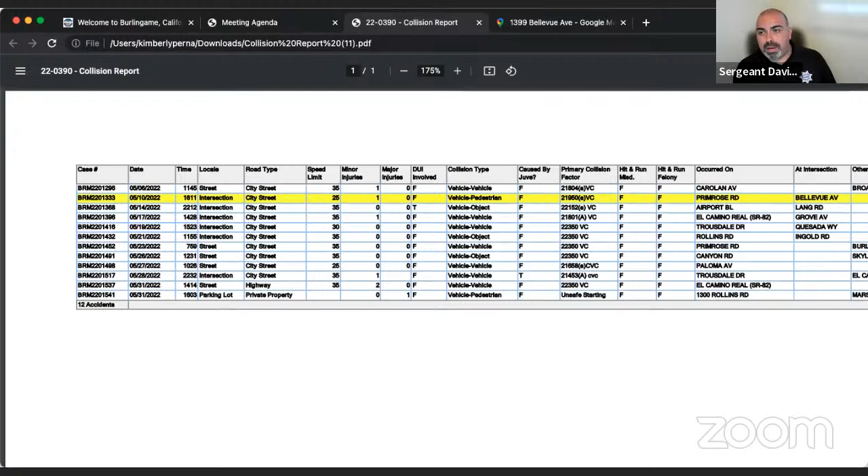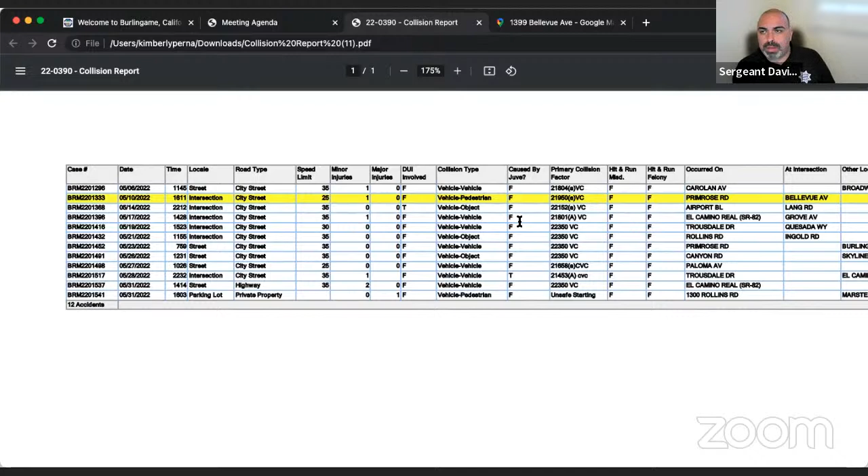I think that heat map comes up in another couple months, right? 2 months or something, because we just have. Yeah, the link, I think, is still available if you have it. I'm not sure if this information, this past one, is on there. It might be, I have to double check. If not, it's simple, I just need to update it, but the link would be the same. But yeah, whenever you guys want to do that and bring that up, we could do that as well. Okay, great, well, thank you very much.

And then that brings us to item 7C, which is the vice chair and commissioners' communications. There's only 3 of us this evening. I don't know if any of you guys received any communications that you want to bring up.

Yes, I believe I had one, and Commissioner Rebelos, I think you did too, from Manito Velasco, talking about the collisions on California Drive, that the vast majority are due to dangerous lane changes and sideswiping of each other. And that would be the south end of California Drive from, what is it, Howard South or Burlingame Avenue South? Do you remember exactly what he wrote? Anyway, he's very concerned about all of the collisions, and the causes are how narrow and substandard those lanes are as you drive on California Drive. And so he brought that up, and he brought up that back in August of 2021 that BPAC had requested

that the city consider a pilot northbound bike lane from Peninsula Avenue up to Burlingame Avenue. I guess it was Burlingame, we have to look at that. A pilot bike lane just on the northbound side. So that would maintain all of the parking on both sides, but we would road diet California Drive south of Burlingame Avenue into a 1-lane road diet, so that we wouldn't have all those side-swiping collisions and lane changing collisions. And then we would have a pilot bike lane. And so he wrote about that.